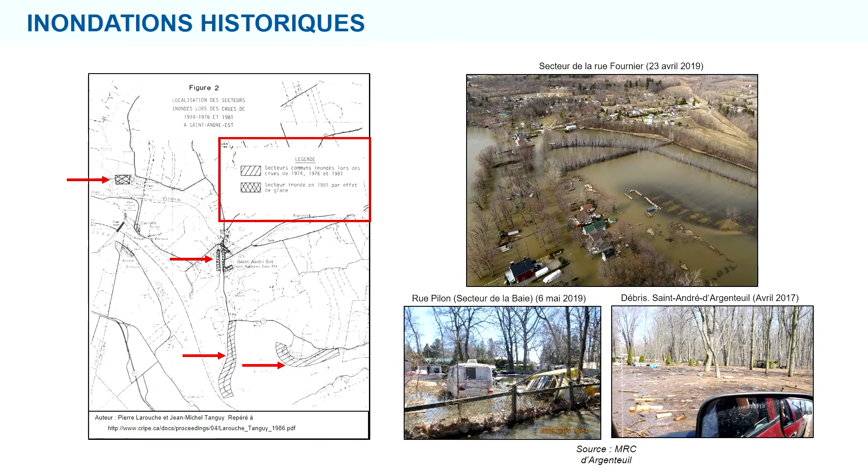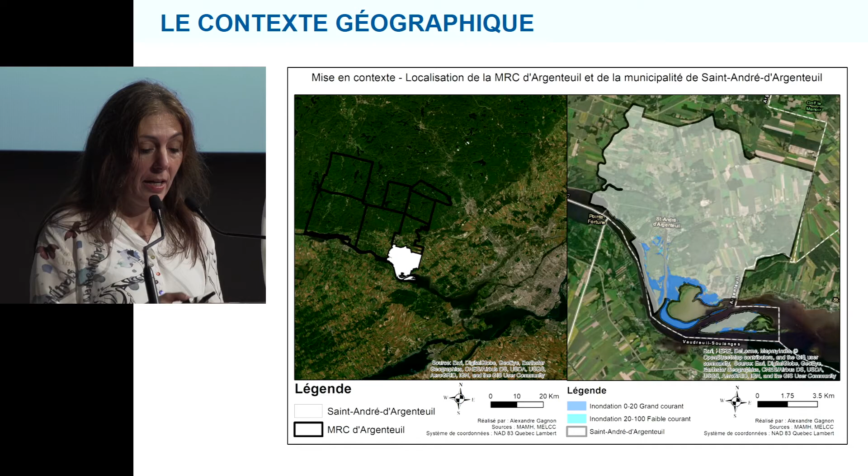Now, with the mapping, we change the terms. So I have been flooded already, I won't have any more floods before some 100 years from now. But no, not at all. And we see it between 2017 and 2019. Unfortunately, there can be more floods.

And here we've mapped the sectors I want to talk to you about. Very important, the sector of the Baie de Carillon, Terrasse Robillard, Rue Fournier, Saint-André-Est. And what's interesting with this project is that it has a political bearing.

The mayor whom we met with Eric came to get us. And several colleagues were talking about all this in the media. And he said, I have a small municipality, I have a major issue at stake, my citizens are at risk. Please help me design a project, and a project where we'll not only move things, but we will have options,

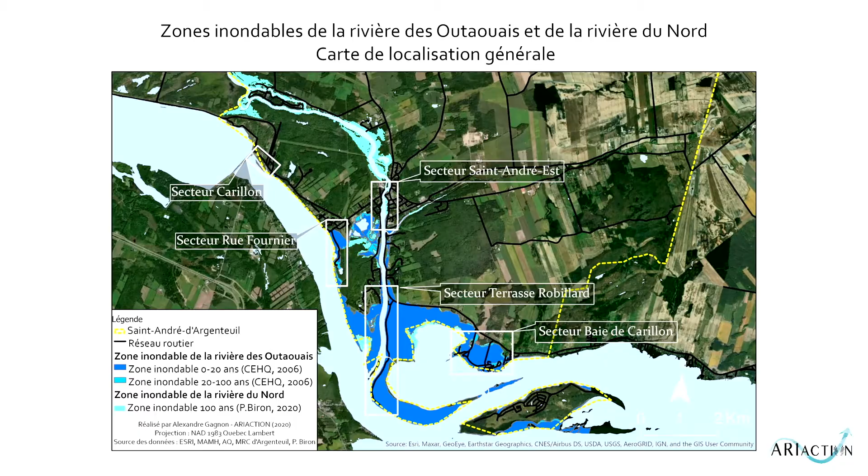strategies, so that they can remain in our city. We don't want them to leave. You see, it's difficult to tell citizens you must move, go away, but yeah, where? Especially with the prices and with COVID, the price of real estate has really gone up. And so that's the beauty of this project, which really attracted us.

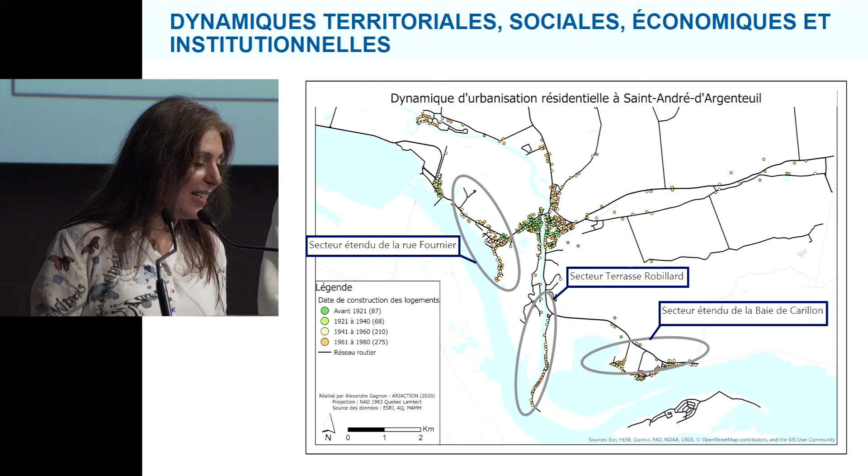And as a geographer, I like maps, very important to understand the territory. And so gradually, from the 50s until 2021, that's where we stand today.

And this is what's interesting. We can link up with yesterday's conferences and today's, the importance of time, of space, and the importance of what is lived in and what is not lived in. And you see, gradually, citizens, we like water. They got closer to the waters.

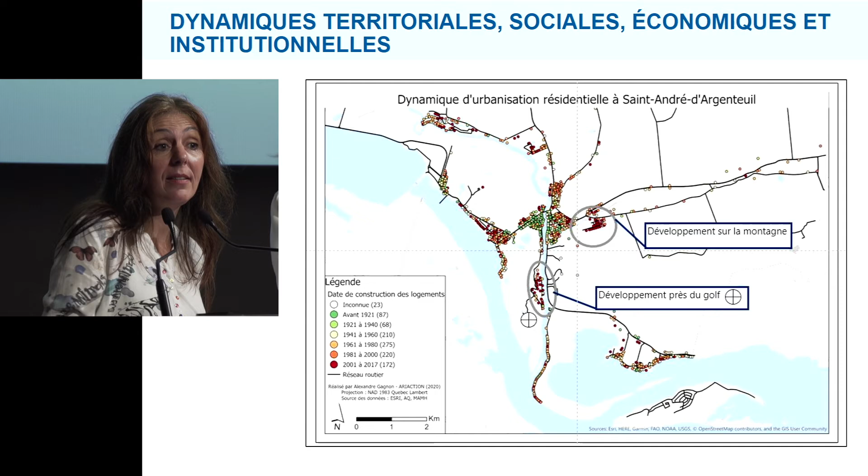And in red, it's a bit difficult to see, in 2021 we see the current issues: some homes were flooded at more than 50%, and the state wanted to destroy them. So we have a territory which is full of holes. Nature is invited into these areas, and it is not always wanted, this nature.

And so that is also very interesting. Now, to understand the territory, we need to have data, rigorous data. And thanks to this rigor, we'll have transparency and the acceptance from the citizens and the elected councillors. So this is the new method. We can't tell you much about this yet, we are working on this.

They have used the English methods, the area that can be flooded every 100 years, and we use the depths. We also use the speeds. I know that you do it in France too, because the speed at which anything is flooded, the speed of the current, is fundamental to provide enlightened solutions.

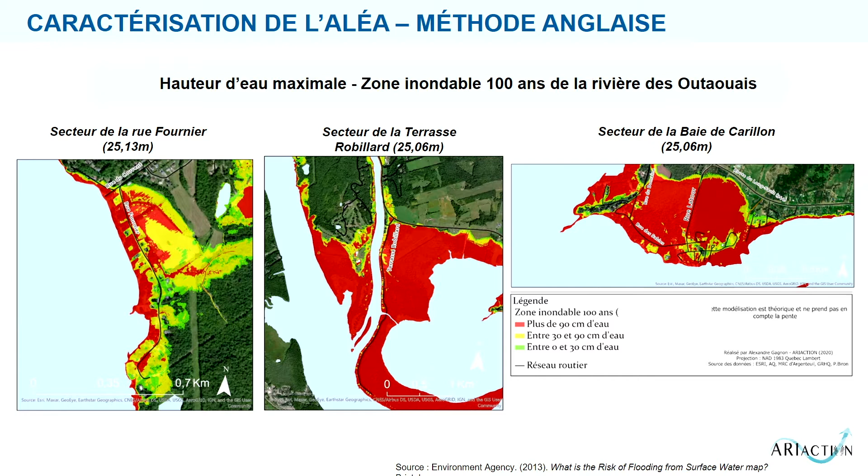So here you have the 3 sectors, and you can see that at Terrasse Robillard or Baie Carillon, you can have more than 90 centimeters of water, which is quite high.

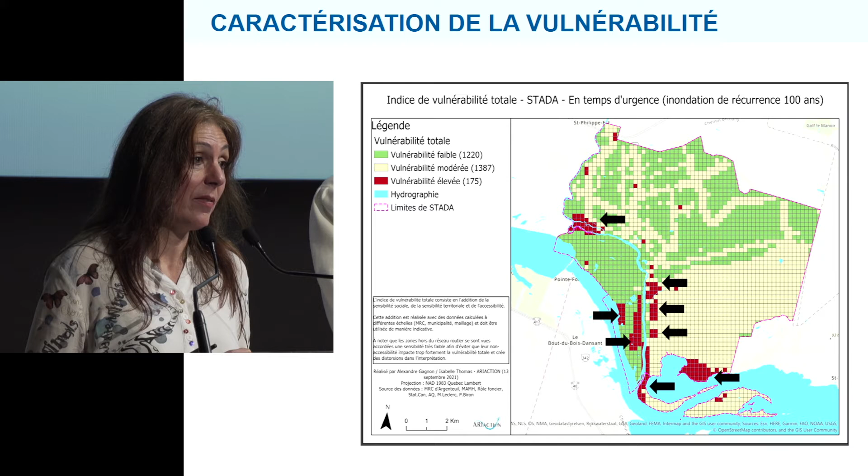And we've also developed a method to analyze vulnerability, and this is very important, and this is what we're trying to do. We're training the officials, and this vulnerability is very interesting because the objective is to map not only a social vulnerability, that is who is on these territories, a territorial vulnerability, the famous infrastructure which are essential, and all the heritage, we want to protect the heritage of these assets, and all that is related to access, because a territory that is not accessible is a territory which is at risk.

And here we collect all the data, but it's important to see what's behind all this data, and then we separate all the data. And here you see the sector of the Terrasse Robillard, more than 90 centimeters of water.

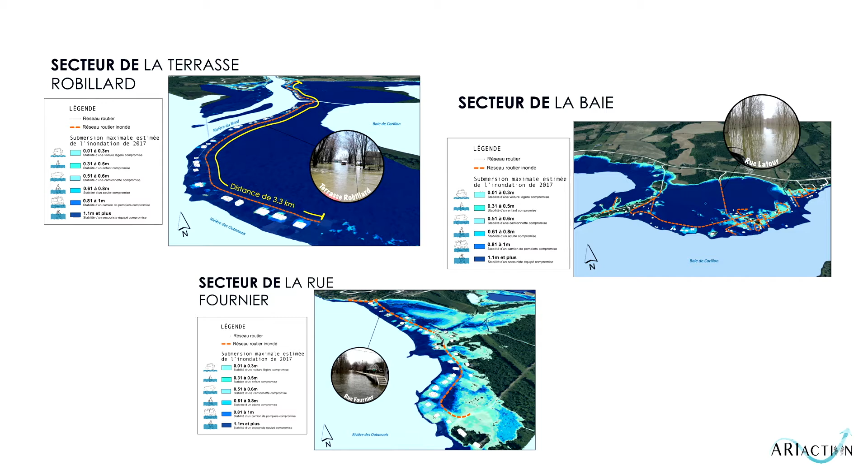That means that the firemen have trouble getting there, and thanks to the firemen, they don't go through the road. They go with boats to help the citizens who've stayed back, the famous Gauls who stayed back.

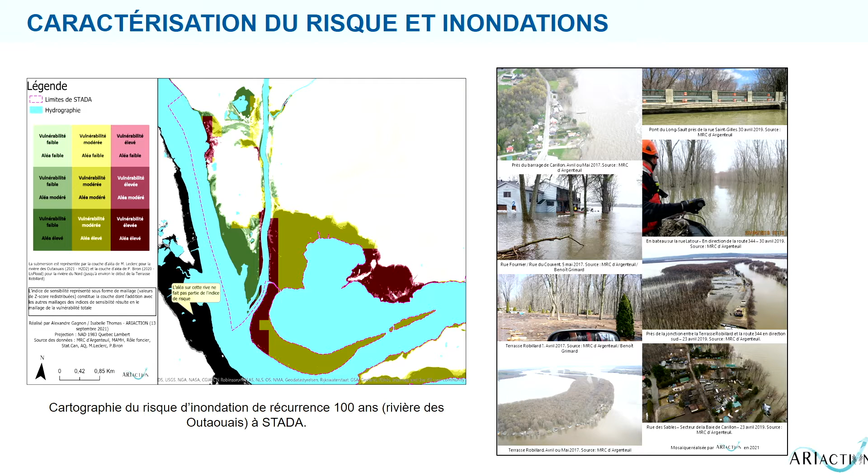So we end with the risk analysis, as you can see here, which is the hazard and the vulnerability together. And on the other side, you have the map showing the potential risk and the reality, that is the floods in 2017, 2019, and sometimes with more than a meter of water.

And when we talk about the changes on the territory, well, what do we see? We see that there are a lot of holes and gaps. And it's very difficult when we think about revamping the territory, it's like a puzzle. But here you have the pieces of the puzzle that are changing, and we are redrawing the space.

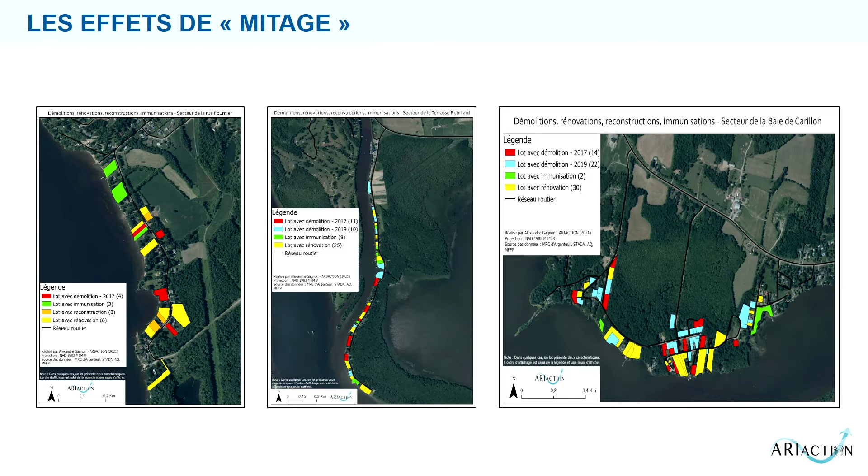And the major contradiction, and this is why we're working on policies and regulations on a given territory, between 2017 and 2019, some homes were reinforced, some were immunized - I mean, it's not the right word, but they were adapted - and some homes were destroyed because they were really destroyed. And there are some territories that need to be restored naturally. So we need to follow these tools, monitor these tools, and we need to be coherent.

And we are urbanists, and what is important when we work on a building is where does this building stand? And we work a lot on these districts to make sure that these districts are viable. At Saint-André d'Argenteuil, we're getting there. It's a co-build approach, and that's very important.

In North America, we have to integrate the various stakeholders to have a political and social acceptance. So here you have different players, stakeholders with whom we work: the municipality, professionals, ministries, very important, the regional organizations, the MRC, and the citizens.

The citizens, well, we found the tools, the committee. This is the river committee, and here there are two rivers, and we can discuss about all these issues with the citizens, and then it trickled down to the different districts.

And some citizens were in favor of the project and others were against, and therefore we had a good idea. So these drawings were done thanks to surveys with the citizens for the imaginary. What would you like to have?

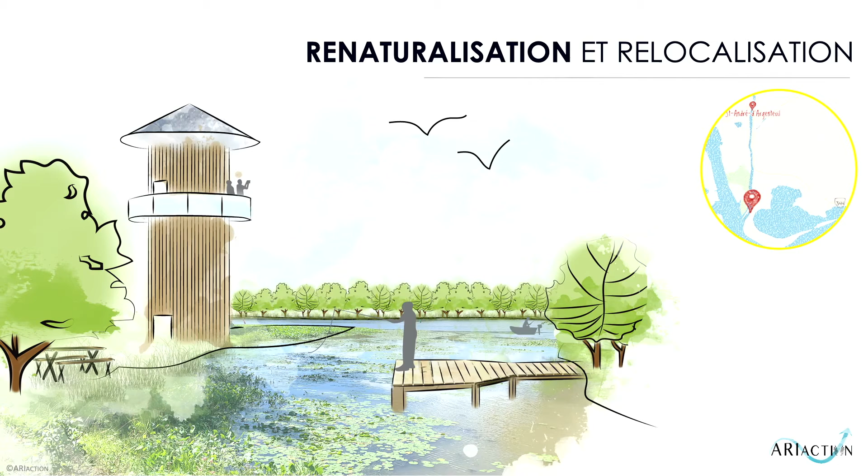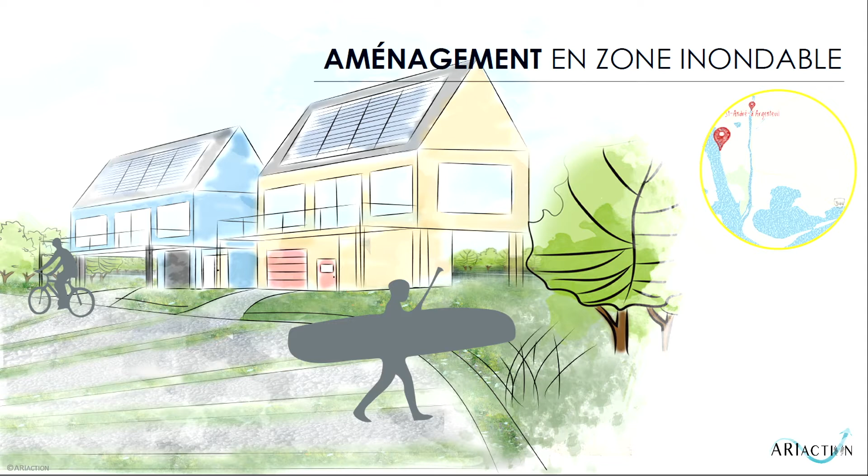Here they want to go back to nature. Going back to nature means you can go fishing, you can have access to that nature. And that nature is destabilized by pollution, with invasive species since the pollution. And the mayor would like to have banks, access to these banks, and he would like people to come and sit. I have 5 minutes left, that's going to be very difficult, so we'll continue. And then sustainability, more density in the city.

I'll be quick. Our objective was to develop educational activities in an academic way. There were two lessons, one on risks and urban risks in redevelopment, and the other on landscape planning. The students, including myself, were part and parcel of this brainstorming exercise.

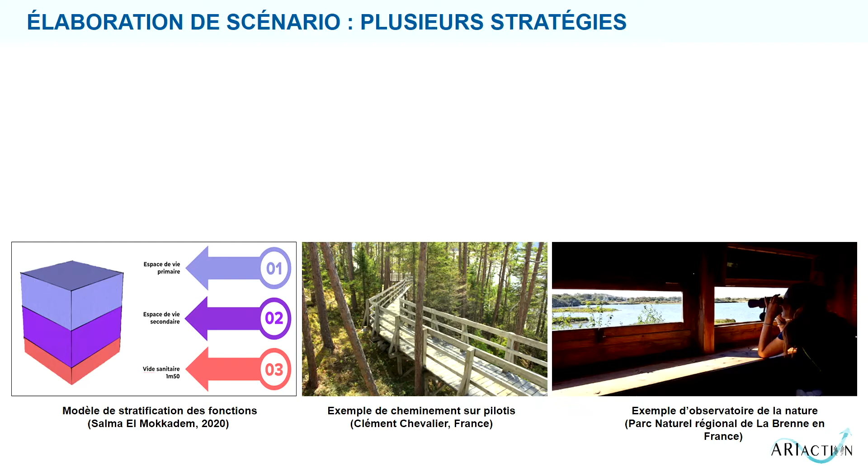We came up with a number of scenarios, and here they are. For instance, these are some examples. Relocation - I'll talk about this later on - of the Terrasse-Robillard and the Baie-de-Carillon-Rue Fournier sectors to a place that cannot be flooded.

And another one based on the stratification or layering of functions. It's based on a spatial and functional approach on housing units so that they would deal with water. There are plants in the architectural design, but also the volume design, so that we can quickly absorb the water naturally. So there's a layering.

There are 3 levels. The first level is an open void, 1.5 meters - that's the only function for this level. The second level is for movable goods, far away from the essential goods you need in a house. And the third level is the bedrooms, living room, sitting room, bathroom, etc., which is the sheltered and protected level, thanks to the other levels that can be flooded, but not the third one.

Another thing is restoration or redevelopment of riverbanks, and we want them to be more stable. We did this with plants with deep roots to keep the soil, and to preserve water quality, and to avoid contamination of the soil with pollutants.

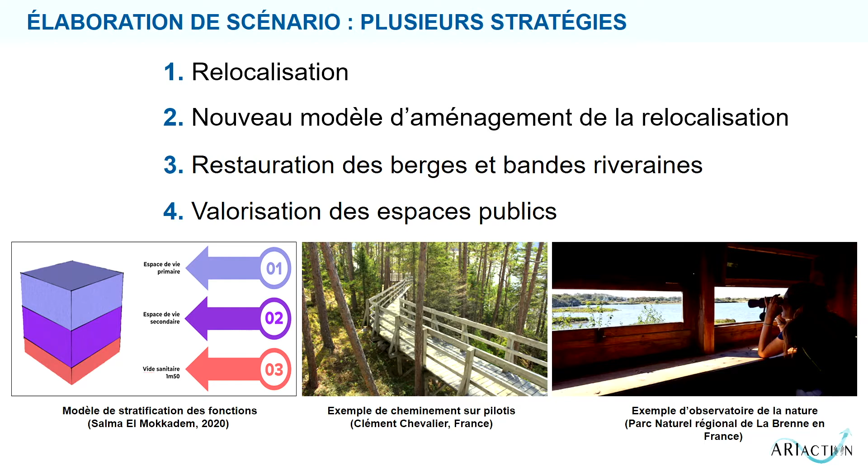There are different layers of plants. We have herbaceous plants and shrubs. And finally, the valuation of public spaces, pedestrian precincts, for people to have a stroll in the forest to observe fauna and flora. So cities are at the heart of climate change.

Their future will depend on our ability to invent inhabitable urban spaces that are fair and resilient. We'll continue very quickly. We'll take a bit more time, though, because it would be a pity if we couldn't show you the full scenario.

This is the mayor's project. There are three major themes: renaturalization and relocation; innovative development in floodable regions; and adaptation, which is number three. The objective is to co-design these three scenarios little by little, but in a synchronous way at the same time, so that we have homogeneous urban and town planning.

Space reorganization, that is relocating and displacing population. We have 172 homes that can be flooded in Saint-André d'Argenteuil with 3,000 inhabitants, and therefore in this case we thought that we would listen to the needs of the inhabitants and the dwellers to know what they need in these sectors, in areas that cannot be flooded.

Therefore, in the places that are not risky, they want something that's green. They want to have links between the different dwellers. They want to be close to the water, but also they want access to the river banks, because many homes and houses at present have private access to water and the river beds - the river banks, sorry. We'd like this to be collective.

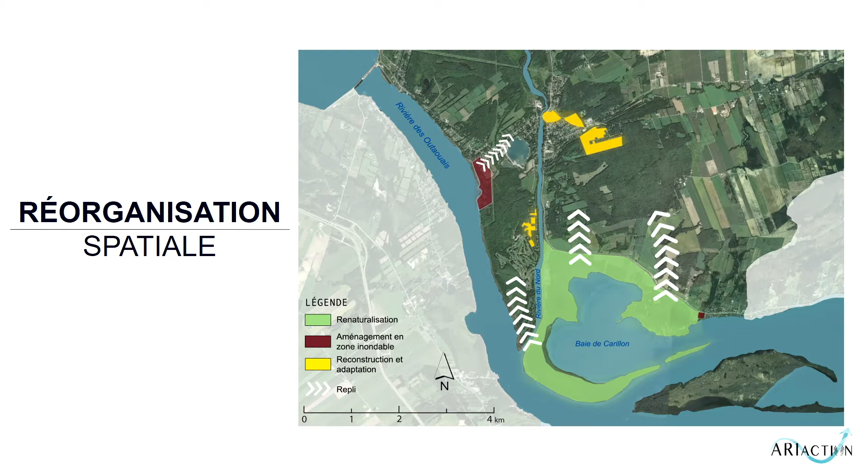Look at this drawing, it was done with the mayor. What's difficult for the time being in reorganizing things spatially, according to the mayor's wishes, and as Eric was saying last week, is that if you look at some districts here, maybe the colors should be changed, because in some districts we would like to relocate the population, even though it's risky, averagely risky, whereas in other cases we think that people can be displaced, but they will have to go to non-risky areas.

But after a crisis, what do people do? They seize opportunities. And what are they? Well, to renaturalize as much as you can these areas which are natural zones, and also give public access to the riverbank. Of course, that's easy to understand, and to adapt the existing districts and create these places where people will cohabitate, and that'll be friendly places. So for the town to be rebuilt and to keep the inhabitants. That's the mayor's scenario.

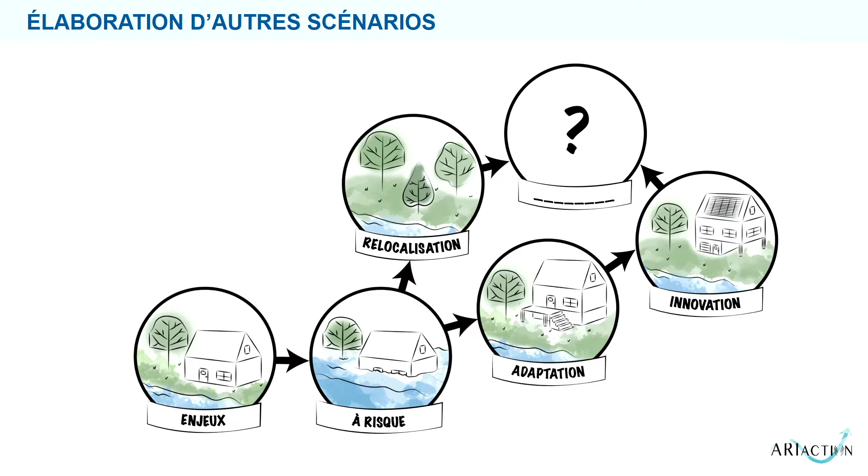But we work on another scenario, because our objective is to have a scenario that's acceptable in terms of the coming regulation, and something we can fund. We have a really good plan to protect the territory, but there's also a call for projects in parallel, so our objective is to develop a project that the government can fund, and also that doesn't put citizens in a dangerous or hazardous place.

What's very difficult, and I'll show you the conclusion, is that we saw massive changes in terms of how people perceive risks. It's been the case in the past 2 years. After the floods in 2017, the inhabitants wanted to leave. And after 2 years of floods, they wanted to leave again.

But 2 years down the road, we had spats of drought. And with COVID, the price of homes really skyrocketed. People need to go to the countryside, and now it's very difficult if you want people to be displaced. So we'll have to educate the local population and work on that.

Now, these are the ingredients — this is what it takes before you could redevelop resilient communities. As we said earlier on the first slide, we need to have a regulation that's adapted to the needs of the local citizens. We also want to have a continuous urban fabric. At present, it is what we call a 'mitage,' a moth-eaten type of town, due to urban sprawl. So we want to displace people into areas where the risks are not as high.

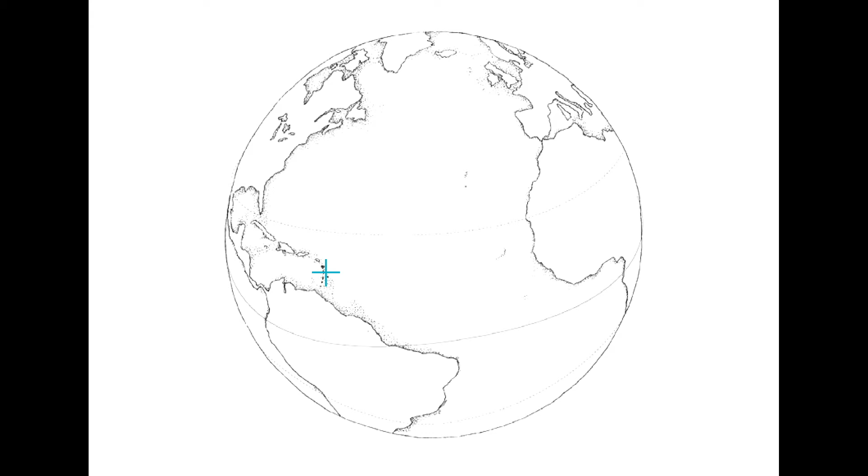And the driving force for us, the point of focus, was the waters rising. This is where we are — this is where Martinique is, close to the Caribbean, on the Atlantic. We have an arc of islands, which is a Zone 5 earthquake region. Le Prêcheur is a small village to the north of Martinique, and you can't drive around the island there, as you can see — so you see where the roads are. That's the beginning of a tropical forest here.

We have 1,500 people in the village, mainly in informal dwellings. So the question of natural disasters has to be looked at in a different way, through different lenses.

Oikos nomos and oikos logos for economy and ecology, meaning both rules and language. And at the crossroads is oikos, that is the habitat where you live in a spatial and natural way, which is what architects, town planners and urban planners do.

The first thing we did is that we wanted people to understand that the coast is not like a border between sea and land. It's some type of thickness. You have natural disasters going from the land to the sea, floods and hydrographic disasters, and natural disasters coming from the sea, like flooding. So we are at the interface between these two types of movements on a mobile geography that's very sensitive, and most of the people live on the coast.

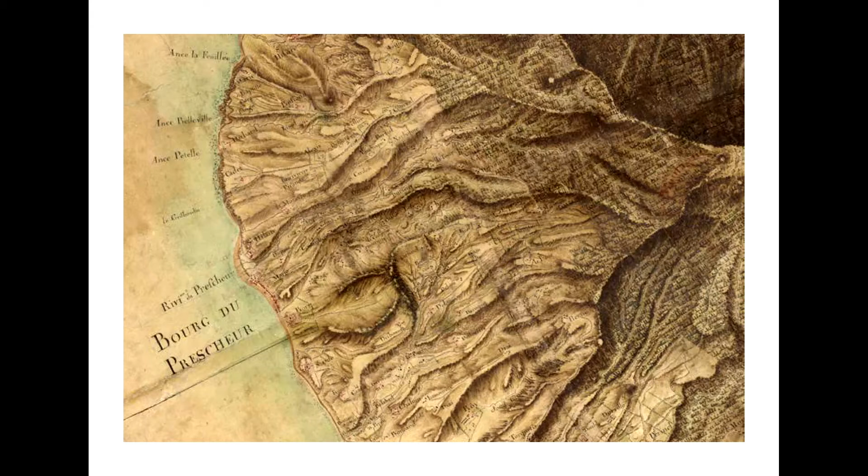We looked into history, and on the map, before the 19th century, what you can see is that the coast was not very much inhabited. Most of the citizens were living in the Morne, the little mountains and hills you can see on the map. The coast was only used for trading and fishing. It was an interface of mobility and exchanges, not a place where people would settle.

In 1902, the first eruption of Montagne Pelée happened. 28,000 people died; just one person survived. There were supposed to be legislative elections, and the authorities didn't want anybody to leave the town because of them. So Saint-Pierre, the capital city at the time in the Caribbean, was destroyed, as well as Le Prêcheur, the other nearby town.

That's when the authorities decided it would be banned - they would ban people from settling down here. In 1929, there was a second eruption that could be stopped. Part of the inhabitants were protected and sheltered, and at that moment the two cities really disappeared.

Yet people decided to live here again because they said it was a place where they could live and find something to eat, and this is where we have really fertile soil on the island. So they decided to settle again on the coast, even though there was a ban. That's why you have all these informal dwellings and places alongside the coast.

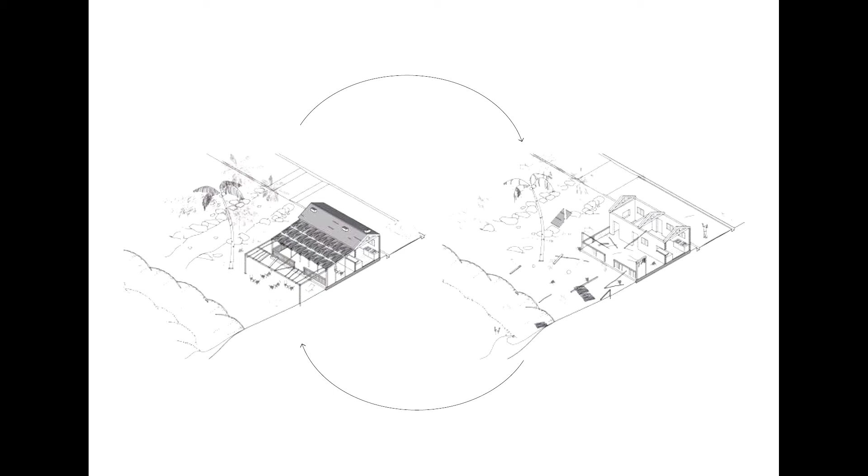And we thought, couldn't we reuse this idea at a territorial level from the architectural level? So we looked at the pre-Columbian dwellings.

At the time, this is what they looked like: groups of families with a collective dwelling in the middle that was used for storing food and also used by the local community. And you had these huts or places where people would stay at night for families. In between, people were in the so-called Caribbean garden.

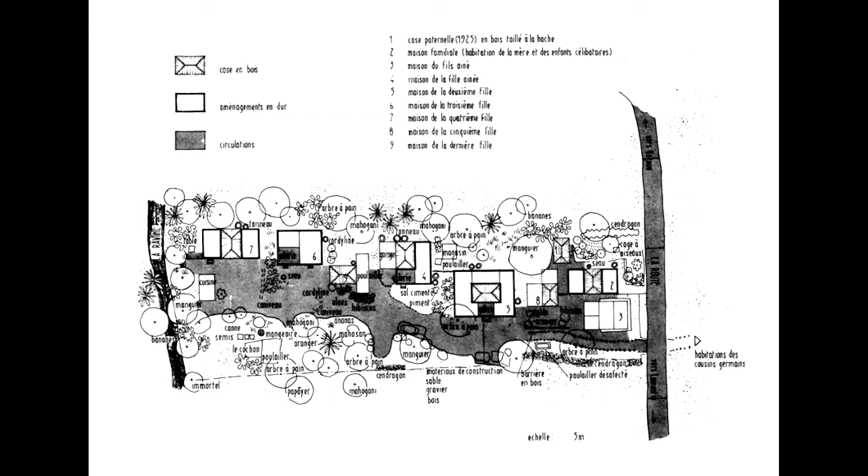And these were the subsistence types of agriculture. This is the Creole survey with more modern huts. And you can see what we saw before with different types of homes, something that's hard, and also the other parts of the structure that can be blown away by the wind.

And this is the type of model that we can see in terms of informal dwellings and homes.

We have a Caribbean garden that's been modernized in the different streets. And what you see here has nothing to do with town planning. This is public spaces, semi-private spaces, and it's very difficult to delineate covered spaces, non-covered places, and therefore sometimes you have to cross, if there's a plot of land, you have sometimes to cross your neighbor's plot of land before you reach your own home. So nothing's been well planned in advance in terms of town planning.

Our project had three dimensions that are quite simple: to live on the top sides, the hillsides, and the valleys, and also on the plateaus, rather than having a general drawing that would apply in the region. We have therefore three tools. I'm not going to give you all the details, but you see there's a link between economy and the forms of the territory.

The first one is a local currency. Financing is influenced very much by the urban form, as we said earlier on. That is, we have amenities, that's where we want to focus and have our funds, and something more flexible that can be blown away by the wind. And in addition, we had another agreement to go away from the French PLU, that is the traditional town planning and urban planning. We wanted to consider this as a mobile area.

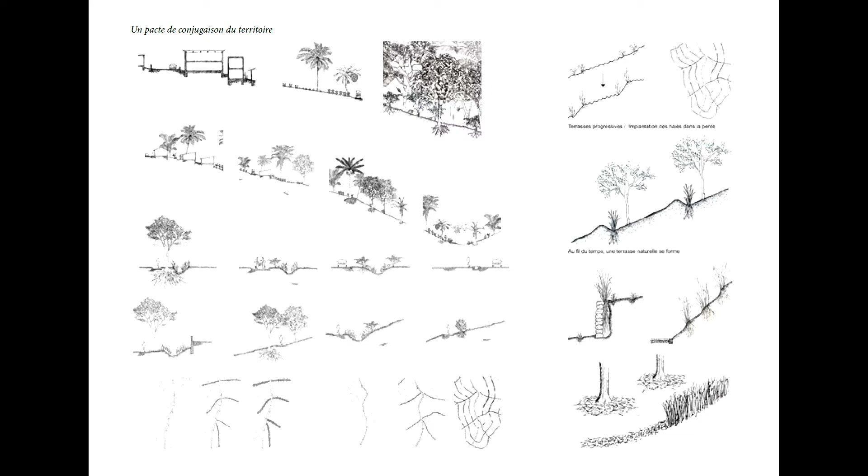And you see these are traces, what we call the traces. Contrarily to a plot, to a system of plots of lands, people manage their plants on the basis of the water that falls. Either sometimes it's perpendicular, sometimes it's parallel, so that we can keep the ground thanks to the roots, so that we could have something else than glyphosates in the soil due to agriculture.

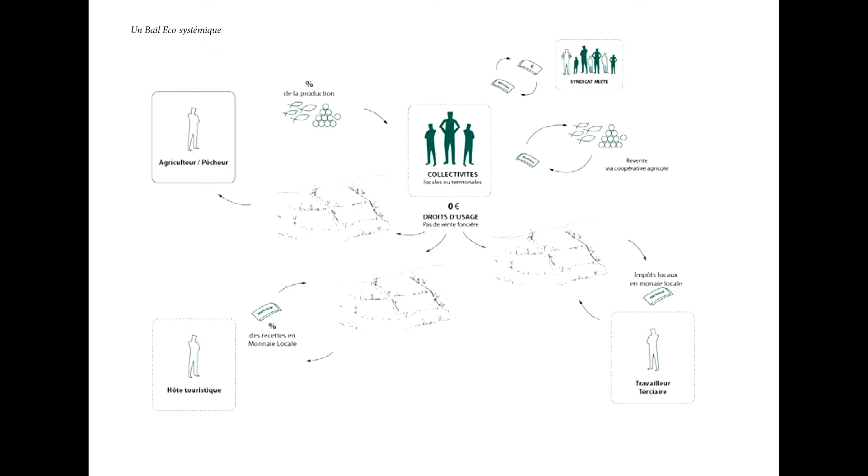So what we decided to do is use plants, and then we had an ecosystemic lease connected to the informal dwellings, and the objective is to show that the rents might be connected to the seasons and the way people live. And this is what it would look like for the plateaus, the valleys, and the mountains.

This is the current village here, and then here on the top hills, we have collective amenities or schools, and then a place of refuge should there be something going wrong in terms of climate changes. And then around those, you have homes there, and then close to the seaside, you have also lighter structures, so that if the road disappears, you can still move here and have some types of exchanges on the coastal side.

Then, after reshuffling things in space, what are the two main risks? It's earthquakes and cyclones, or hurricanes. And the question is the emergence of a social and environmental environment.

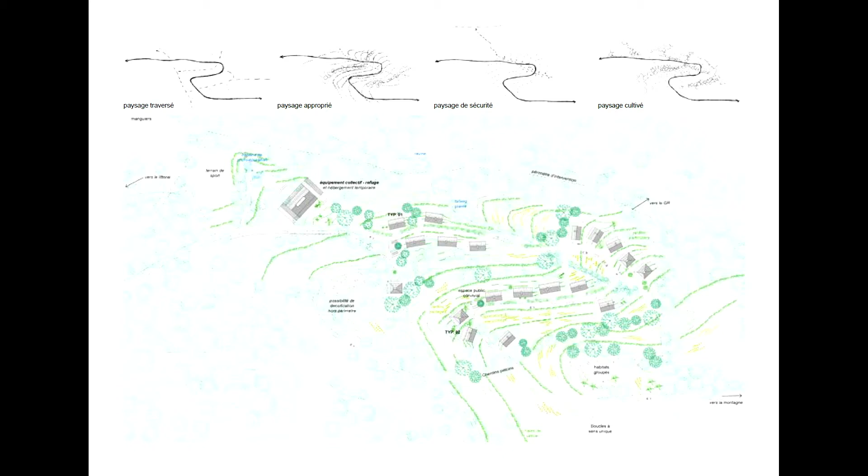All this follows a rationale of non-plot rationale. We didn't want any visible plot. We wanted something shared, or that could be in common. This is what you see here, the interior and exterior. And most important is what's outside these homes—you see the structures that are covered and those that are not.

And this level with the water adduction and electricity, etc., to eat, sleep, and have electricity. And these are the modules on top, thanks to which we can add modules and rooms over time, should your family grow, or if you start with a little budget, and then fibrous elements to be protected and sheltered from the sun. But this is, as I said, informal dwellings.

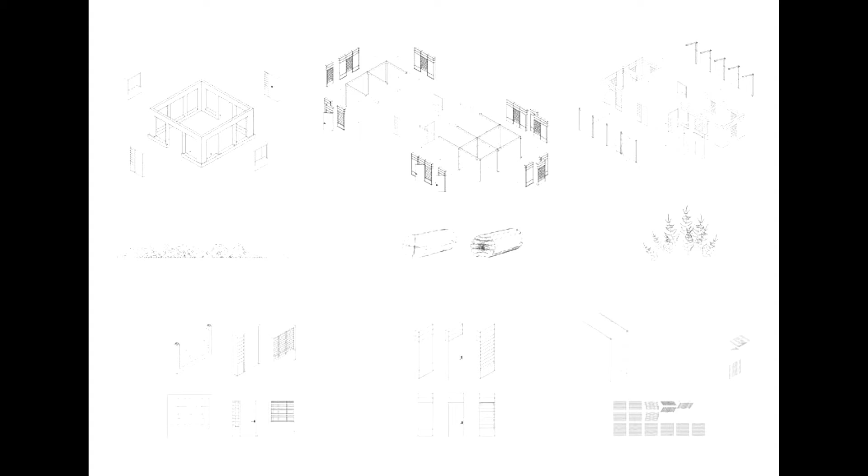So what's important is that we want families to be able to build their homes themselves. It's not something that's one size fits all.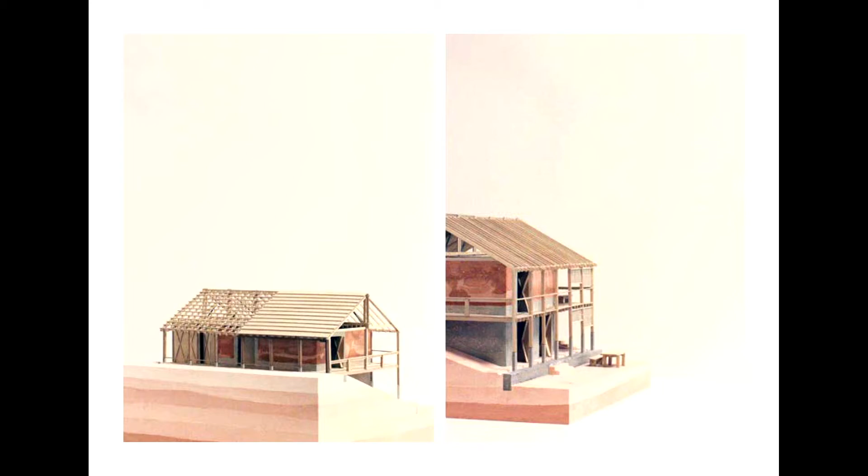So it doesn't follow mainland regulation, but we're doing this because we'd like to finalize our project. On the left, what you see is what it's going to look like during a year. And on the right-hand side, the cyclone design, that would last 24 to 72 hours.

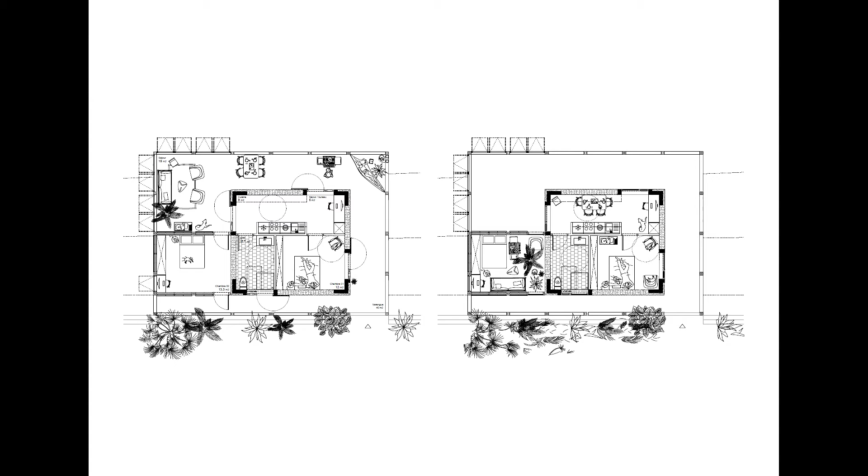So you see some rooms can still be used under tropical climates. And then when there's a hurricane or cyclone, you have this shelter in these 2 rooms, and the rest would disappear due to the wind.

This is the nucleus, and these are all the variations to show you the different layouts and how this can be changed by those who live there, because it's a modular system. And then a cross-section that shows you what it looks like. It's bioclimatic, according to us.

So there's the natural risks, there's the climate, and architecture in this case translates in space and in an informal way, translates 2 dynamics, one connected to the social and the other one to the environmental context.

And these natural hazards or disasters are the reasons why the architects do this. Philippe Rahm, for instance, in L'Histoire naturelle de l'architecture, says that nature is connected to human beings, and these climate events happen, and architecture is an extension of some type of clothing.

This is also a selective mode. We choose the desirable weather conditions. That is, we want to have some sheltered areas with natural airflow, and also we want to be protected against strong winds and strong sun rays.

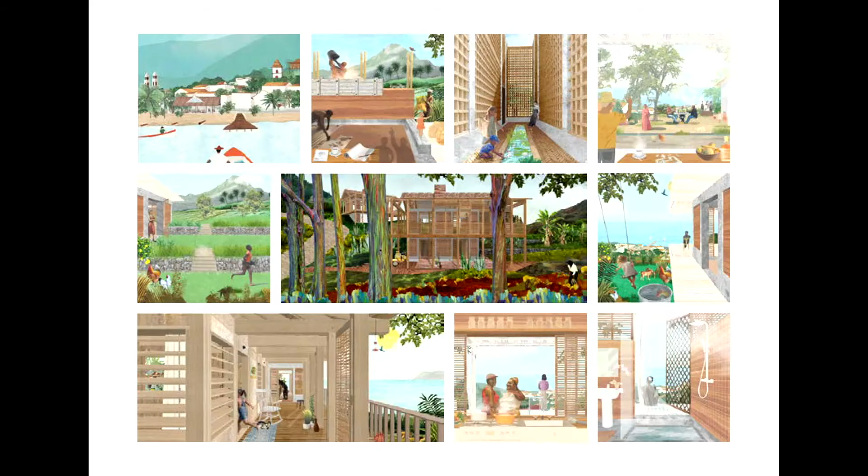And you can't see this in our project, but at least the question is that of resilience to water rise and climate changes, since we have to think about the matrix links that exist between human beings and non-humans in the Caribbean environments. Then the question is that of a second Creole metamorphosis. And rather than seeing this as something appalling or a disaster, it would be an opportunity to reassert the role of the local community. And here's another quote of the mayor after our study, and even today when we asked him why should you go on living there, given the number of risks and hazards that there are...

He says, well, if we were to leave, it would mean that we have failed. We've not managed to change how we live and how we function, and that we can't work in the environment, even though these events are very strong. It would mean that we accept that we failed, we the designers and also all the politicians. I'll finish on that note because I think I was too long.

Thank you, Félicien.

Now, this afternoon, as you've seen, the topic is open shelters. I presented one for one district. Isabelle talked about a city, and Félicien has looked at another scale, a house, a dwelling, and even air tightness, water tightness, the brick and the bamboos transported to build these shelters.

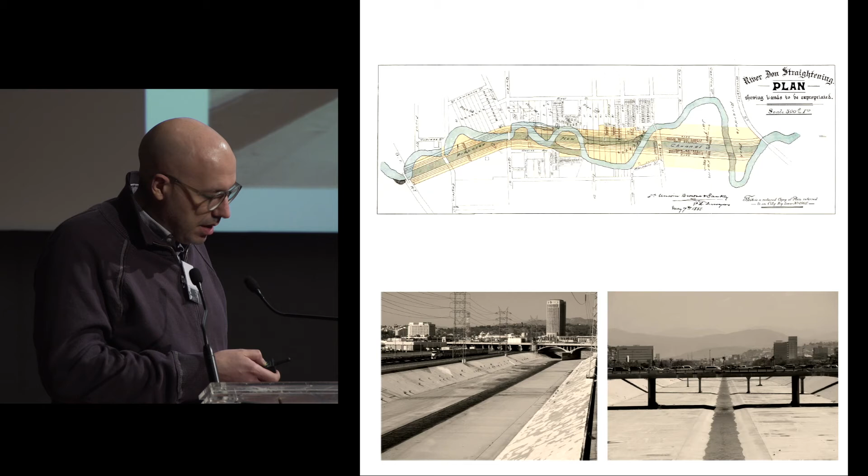But the technical evolution of construction led to massive transformation. So everywhere in the world we can find these highly artificial rivers where basically there is no more space for nature, but at the same time there is no more space for people and for landscape, but also an increasing level of risk. The Molgora reflects this kind of condition.

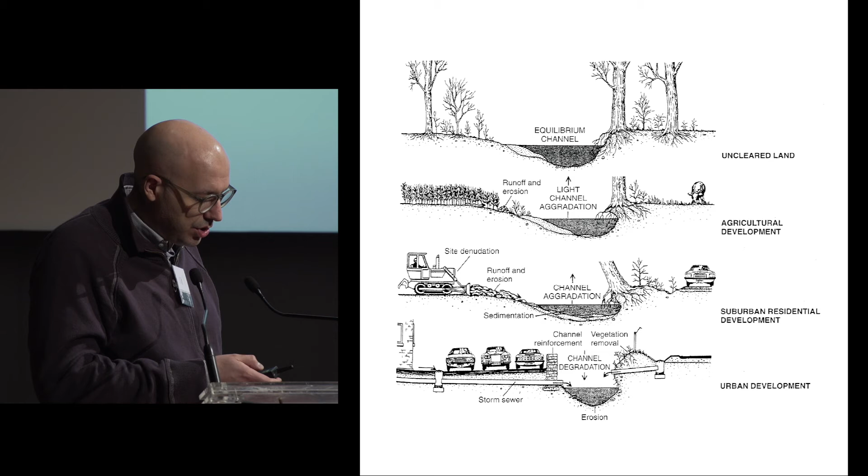But this is exactly the condition that represents another kind of risk: the risk of frequent flooding, the hydraulic risk, but also the risk of losing any ecological structure, any ecological connection along the river, the loss of contact between river and people, and the risk of living in an environment where the river represents a problem, so people are scared by the presence of the river.

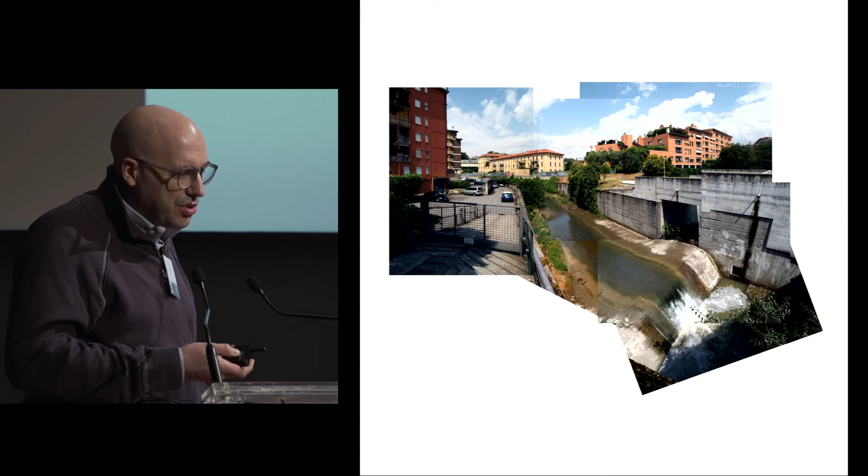They don't recognize anymore the value of the river as a significant part of the original landscape of these areas. I think this photo that I took of the Morla well represents how it's not friendly, not something you can like or love. This is a condition we can find very frequently along the axis of the Molgora.

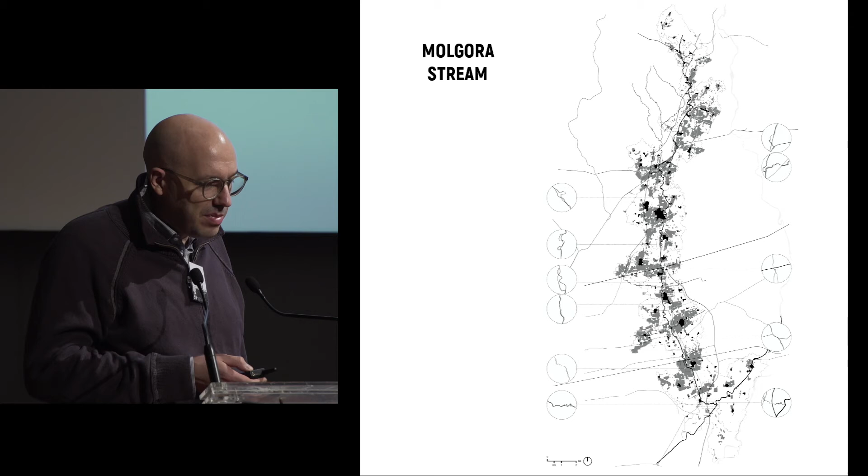Here we can see the watershed of the river Molgora from the Alps, where it runs in a very natural and qualitatively high condition, and then in a very dense urban region corresponding in part to the metropolitan city of Milano, where the stream is constricted inside artificial banks and runs through the urban diffusion of many cities.

This is also a very problematic condition in terms of risk. Here we can see a map of the risk, but also a map representing all the infrastructural artificialization of the river. We have artificial banks, but we also have a lot of crossings, and all the dots basically represent bridges, which represent very complicated hydraulic nodes - these bridges obstruct the flow of the water, creating problems during flooding.

The risk map is also not really 100% accurate in underlining the risk conditions, because, for example, in the city centers, the concrete banks are very high, so the impression from the map is that it's safe. But these artificial concrete banks are very old and potentially subject to problems during flooding and could collapse. The risk of collapsing is a true, real risk.

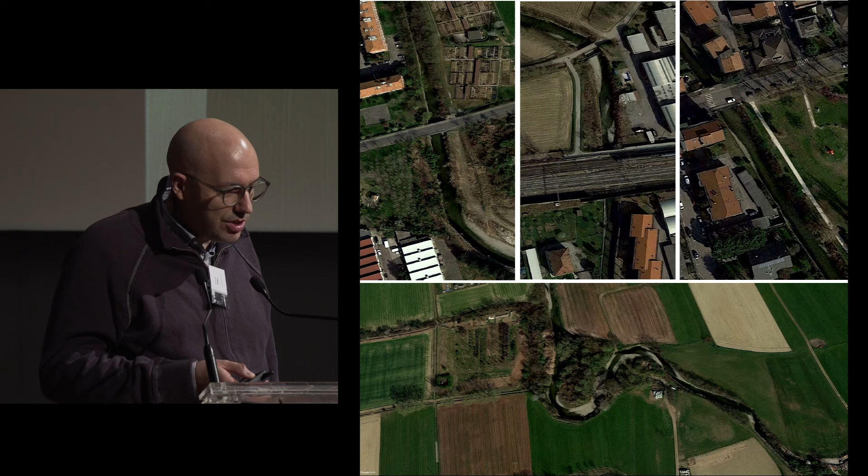Here we can see some of the landscape along the river, the relationship with some agricultural lands where the river sometimes retains its original morphological features, but also the places where it enters the cities and becomes very involved in urban dynamics.

But also in the agricultural land, as you can see from this photo, any ecological link, any ecological connection is missing, because the river was also very polluted, and so the trees died and didn't grow anymore in this place. Now the ecological condition of the water is better. Fishes are back in the Molgora, but the trees didn't come back because of various kinds of situations.

By the way, let's go to the case studies that I addressed to my students, the municipality of Melzo. And here we can see how the Molgora is crossing the city of Melzo.

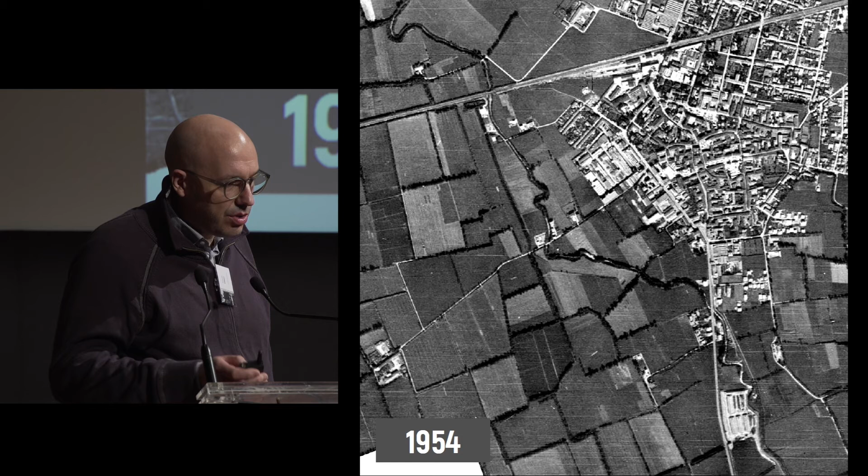This is the same situation in 1954. As you can see, the river Molgora was still completely outside of the urban center of Melzo, and it was part of a very clear ecological network. You can recognize trees along the stream, you can recognize lines of trees inside of the agricultural lands that were representing this complexity, this ecological complexity.

Actually, the river was already artificialized with some artificial banks, but this was a condition still acceptable. But slowly the city grew towards the river, first of all with some industrial settlements, and then with some expansions of residential, mainly residential houses, small family houses.

And in 1962, you can see that the first extra-Molgora neighborhood started to grow, and also the fragmentation of the streams increased with new bridges, new crossings. This situation increased also in the 70s, with still some voids, some potential ecological places.

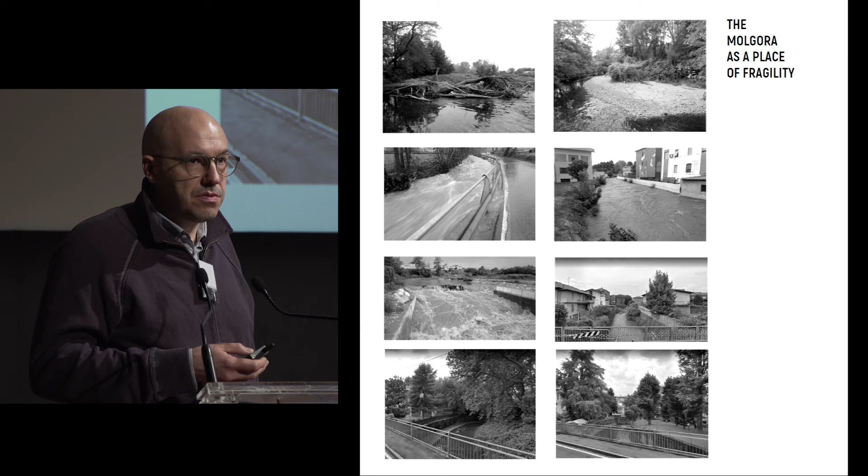And then in 2019, we can see that basically the river is completely inside of the urban, involved in the urban dynamics. And the Molgora is also a place of fragility for several reasons. So I already mentioned the hydraulic risk, the flooding that is happening more or less every 2-3 years. And then fragility also in terms of visibility of the river inside of the city.

But this situation, in my opinion, was increased by the pollution. Here we can see 2 stages of the pollution that I think are quite relevant. The first one is during the fascist period, in 1929, they were celebrating the opening of the sewage of Melzo. And this is the emissary of the sewage inside of the river Molgora.

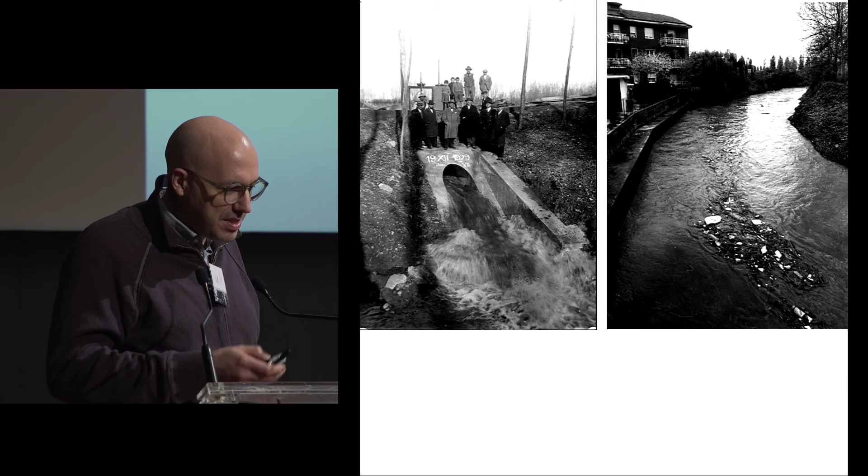This at the time was representing the modernization, and the mayor and all the main protagonists of public life were really taking the photograph on the flow of the sewage. This is quite funny today, but it's also representing how our perception changed during the time.

And then in the 70s, this floating island of plastic, any kind of material released into the river as an open-air sewage. This was related to the industrialization, the public sewages, and problems that nowadays are solved.

And some photos are showing the actual condition of the river. You can see that basically you cannot feel any natural presence in the city, but also when it's a little more natural, it is highly artificial. And the river is crossing important places with some qualities, like for example here, where it's crossing the sporting area.

This area has a lot of potential points in terms of new development and redevelopment, but also a very high risk. For example, here we can see that some underground floors of the buildings are basically below the level of the water because they excavated, and this represents our approach to rivers that was very bad during that time.

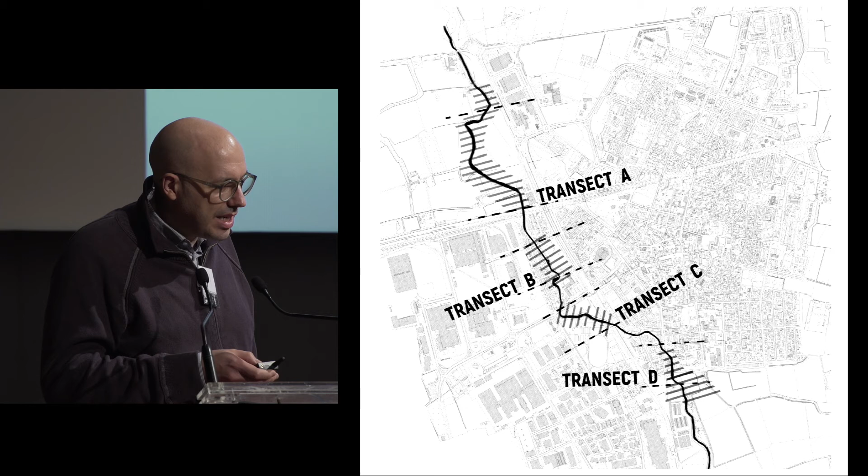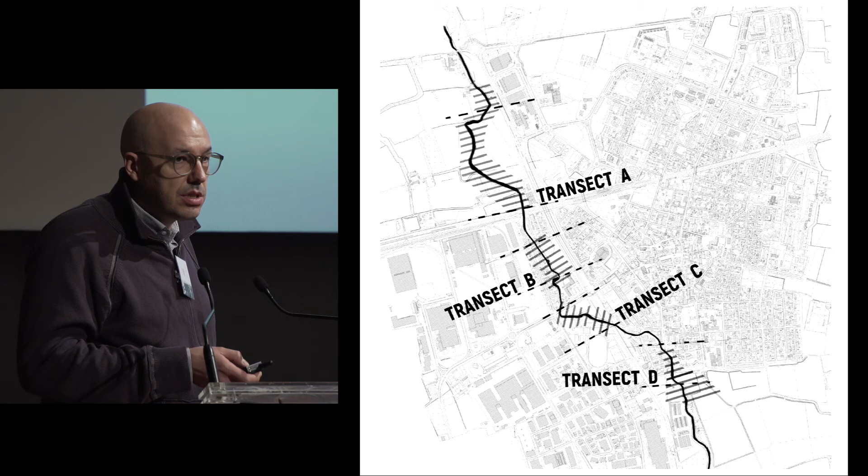2 of them are the transition points between the countryside and the city, and 2 are inside of the city where there are some green spaces that are now completely divided, separated from the river. So the idea is how to re-engage the river in the dynamics of public spaces, but also finding some solutions for flooding and rebuilding some ecological networks.

And here we can see some of the works, just one for each one of the areas. I'm not going to explain the works because they are projects by students of the 3rd year of architecture, but I think the experience itself is meaningful despite the design results.

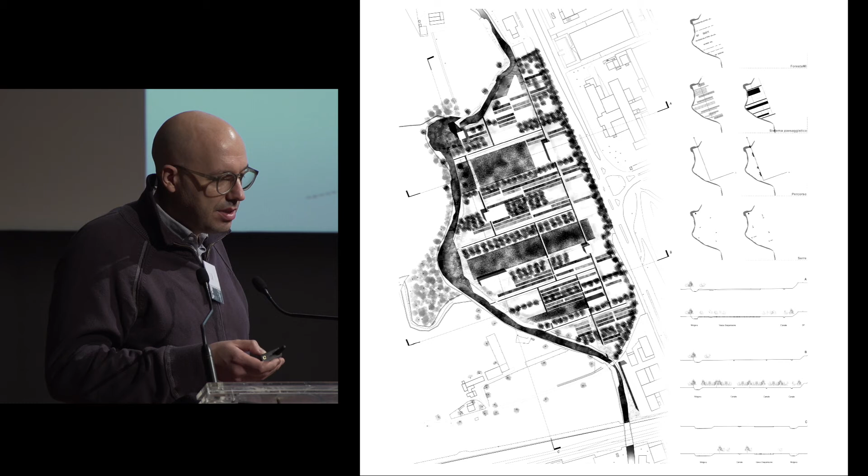But here, for example, the idea was how to create a sort of hybrid park where some areas are floodable areas, and they can produce also an ecological improvement of the water, but also a leisure place for a continuous greenway along the Molgora stream.

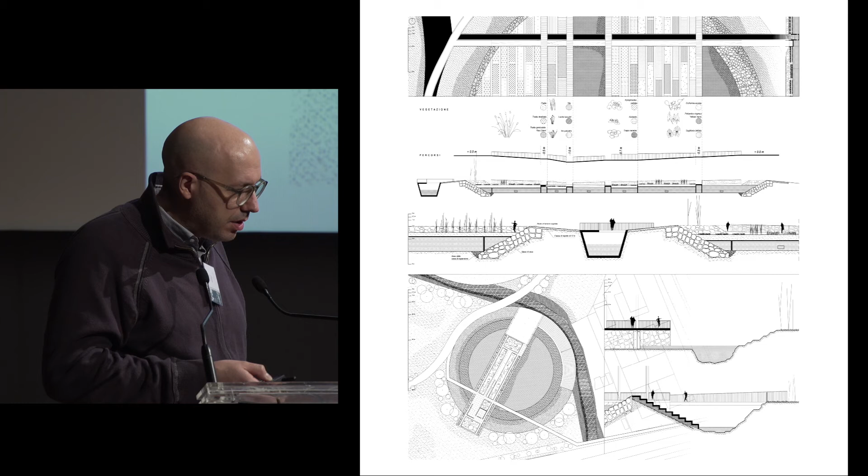But this kind of project, other students developed a very detailed proposal about the purification of water, the storage of water, the reuse of water—all topics involved in the contemporary scenario of climate change.

Then, going towards the city, you can see how they tried to use the water of the Molgora as a material of the public space, and also how to address the Molgora, for example the rainwater collecting along the streets, in the buildings of this residential area, using some shapes of the water for collecting, purifying, and then moving the water towards the stream.

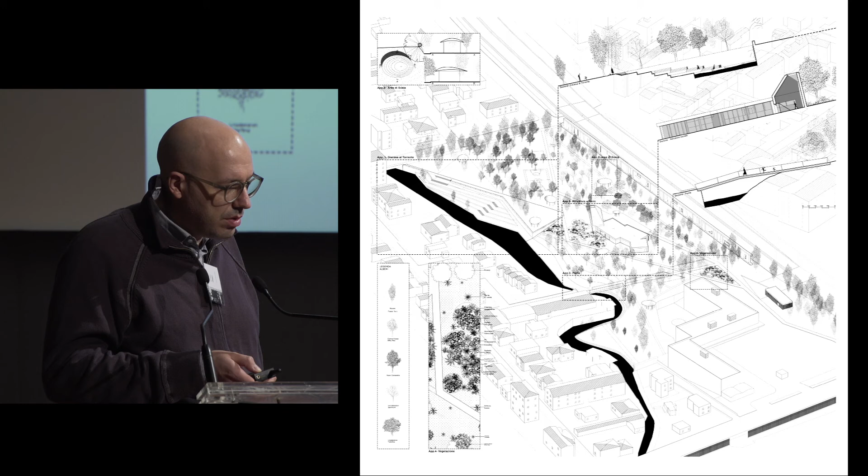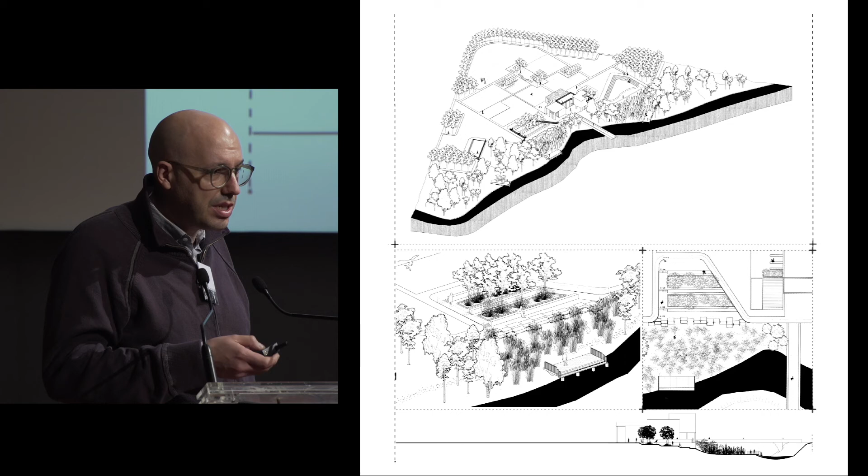Again working on that area very close to the sports center is another place where the discussion was about how to give back naturality to the river—how to create humid areas, how to re-involve the space, and how to create a public space that is basically the public space of the river Molgora. Finally, the last area's topic was again about renaturalization and involvement of the public space as a sort of center for the linear park of the river Molgora.

Some topics are the same in the same area because of a sort of necessity, a didactical necessity.

I think this experience is quite interesting compared to my present research, because now I'm working on the topic of maintenance. The river Molgora is very expressive of a reality that requires a lot of maintenance, because we are talking about hydraulic works that are more than 50 years old. So the stability of the banks, the quality of the bridges, and all the parts making this place extremely artificial are also extremely fragile.

So how to deal with the problem of maintenance in a creative way—this is also another important topic for me. I think the projects of the students are just a sort of visible result of a process, but they are not dealing with all this complexity, the theoretical complexity represented by this physical element of the space. Thank you.

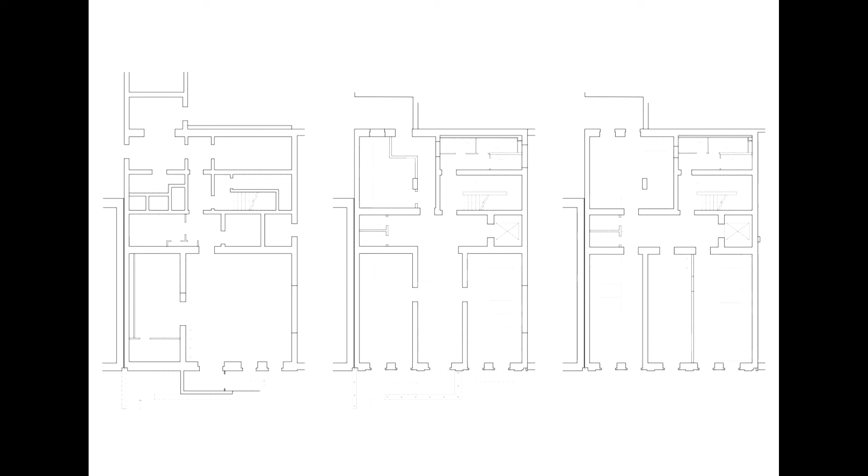But I'd like to move beyond the interior of the space and bring it to its exterior. Because once you step out of the building and away from it, you realize that the building is placed in a very central part of Berlin. If any of you have been in Berlin, this is actually one of the nicer sides of the city. Not everything looks like this.

What is really interesting about this is that it was placed right by a park. It's very close to the central library as well. So it's also very well connected for people who are trying to be integrated into the city.

The architecture practiced something fantastic, following this project from conception to construction in personal interviews with the first residents of the house. It was presented in the 2016 Venice Biennale, German pavilion, entitled Making Heimat, Germany Arrival Country.

In this case, it exemplified so much to learn from. There was a quote that I would like to read: "The need for housing like this will surely exist for a long time, and not only for refugees."

While I do not mean to romanticize temporal solutions, my objective is to place importance on their existence, because the need for these spaces will keep coming back. Studies in what these spaces have to offer, taking a look at all their existing components and seeing the in-betweens that can be used when another disaster strikes.